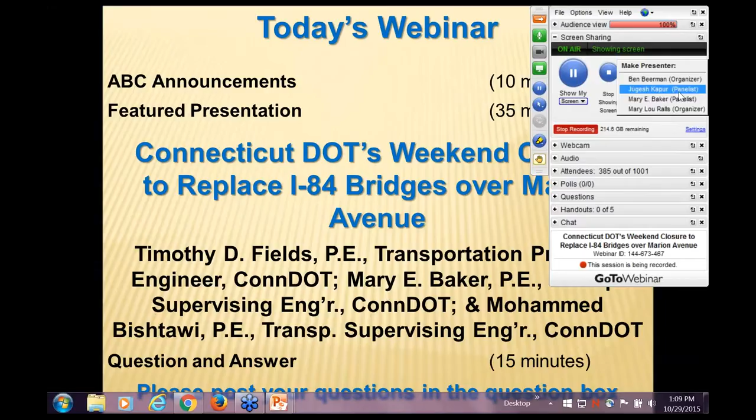Thank you, Mary Lou. I'm Tim Fields, Principal Engineer and Bridge Consultant Design in the Office of Bridges with the Connecticut Department of Transportation. With me is Mary Baker, who will speak about the design phase of this project, and Mohammed Bishtawi, who will speak about the construction phase.

Before we get into that, I want to note that we kicked off our ABC practice in Connecticut in 2011, when we put out a notice to all our designers that we wanted ABC considered in all projects. Prior to that, we actually had several ABC projects before we called it ABC. Back in the 90s, we did two bridge deck replacement projects, significant projects using precast deck panels.

And then in 2004, we did a single pick on a 300-foot truss that was part of our Church Street extension project, which is in the database right now. That was an 800-ton pick that was dropped over about 10 track widths, and these were electrified railroads. So on that particular project, we were driven to ABC by cost.

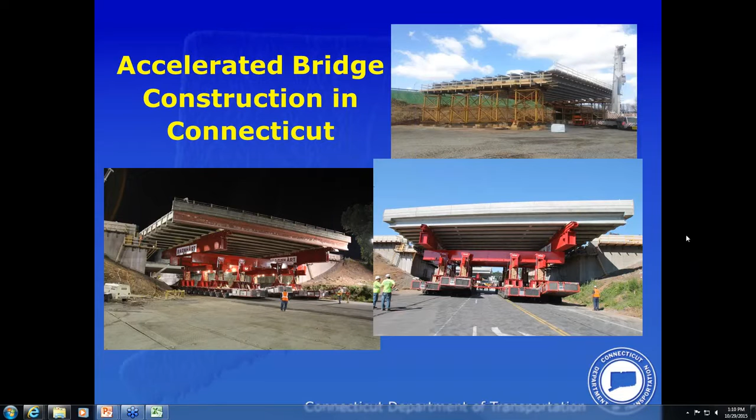But to speak to this project here, given the number of ABC projects we had done, we were keeping our eyes open for a project that would be suitable for SPMT or lateral slide of a superstructure. As we got into this particular project, it became evident during the early design phase that this was a very good candidate for SPMT.

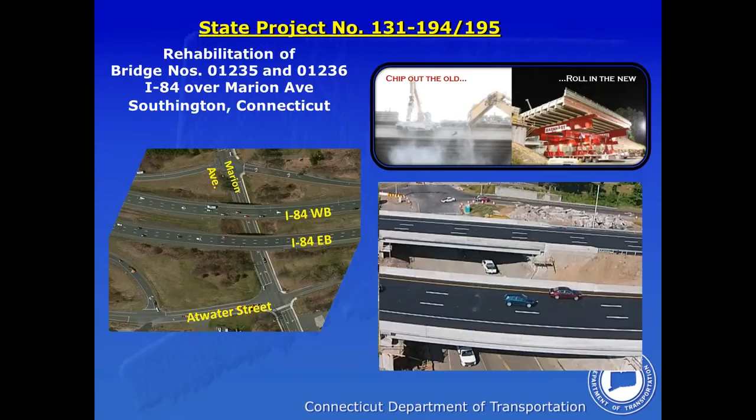The particular span is about a 102-foot span, constructed in 1963, and Mary will speak a bit more to that. But Mary, at this point, I'd like to kick it off to you.

Thank you, Tim. Hello, everyone. Mohammed and I have really enjoyed the success of this ABC project, and we're happy to be here today. We've been able to present this project to several groups. The Southington Superstructure Replacement Project really helped DOT here in Connecticut transform our bridge program and increase the use of ABC.

This slide shows the map of Connecticut. You'll see our major interstate routes and expressways in purple. Southington is located in the center of the state along Interstate 84, just north of the east-west Interstate 691 that connects I-84 to I-91. So we have good interstate and expressway alternate routes here.

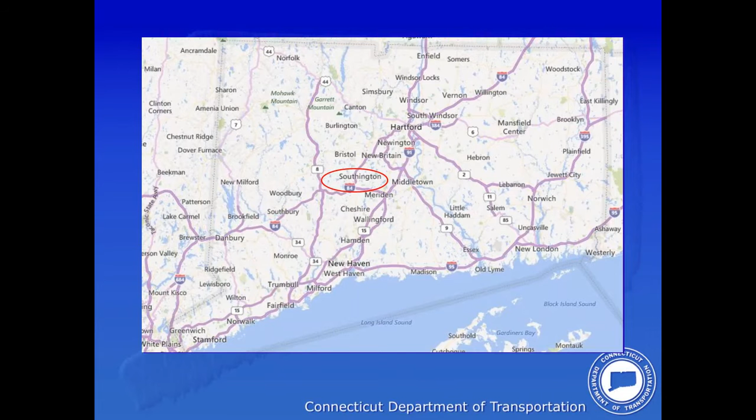This is the aerial view of the site at I-84 Interchange 30 in Southington. The interstate crosses Marion Avenue, a local road. Notice the ample area, all state right-of-way, within this interchange because of how the off-ramp heading eastbound exits onto Atwater Street. The village of Plantsville is just to the east, or right.

Again, the bridges were built in 1963. Both superstructures were in poor condition, and each bridge carries 3 lanes of traffic with an approximate volume of 86,500 vehicles a day. So traveling on 84 eastbound, before you get to this exit, you would see an exit for our truck stop, a very popular venue at exit 28, and also a rest area for travelers between that truck stop and this exit on Marion Avenue.

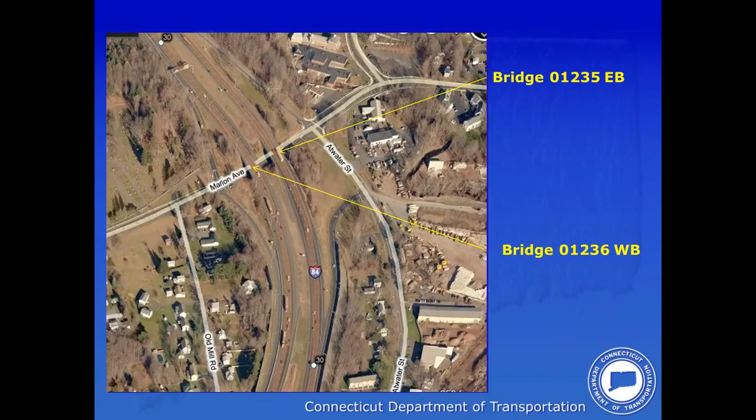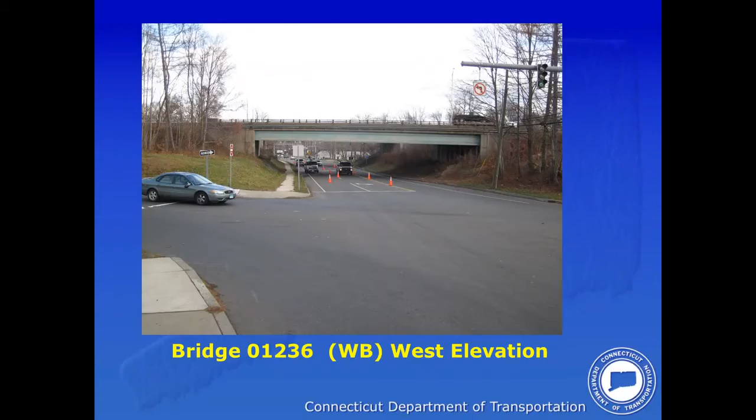Notice the grade of Marion Avenue heading away out of the picture, toward the village of Plantsville. We had a look into that grade.

When we go out to the public, it's difficult for them to understand the need to replace the superstructure. When you're looking at the fascia beams, you don't see as much, but underneath you can see the conditions of the existing beams. There were hollow areas, cracking, exposed reinforcement and tendons. The girders also had longitudinal cracking.

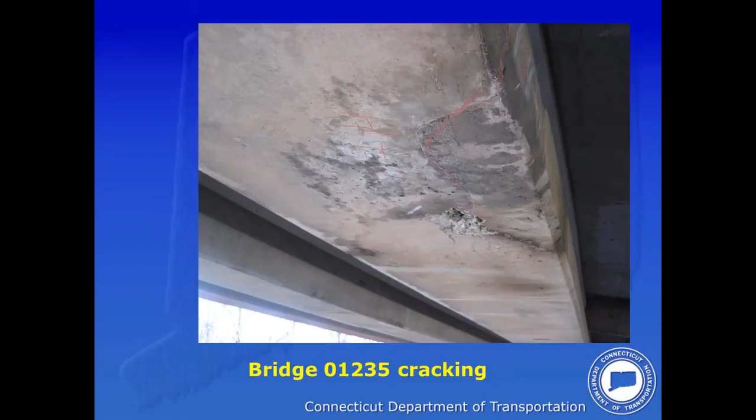Here's an example of the condition of the beam ends. Several beam ends had diagonal cracks with large surface spalls, exposed rebar and tendons. The substructures of these bridges were in good condition, so our project involved replacing the superstructures.

We reviewed different options to maintain traffic. Originally, upon request, our designer presented stage construction plans maintaining 2 lanes. However, our DOT traffic unit expressed concerns about that volume of traffic being able to be effectively carried in 2 lanes. So Stantec, the designer, reviewed the cost of widening the bridges to the interior median side for both barrels of the highway and staging the project using 3 lanes. They also reviewed the ability to have a crossover at this location and utilize a temporary bridge.

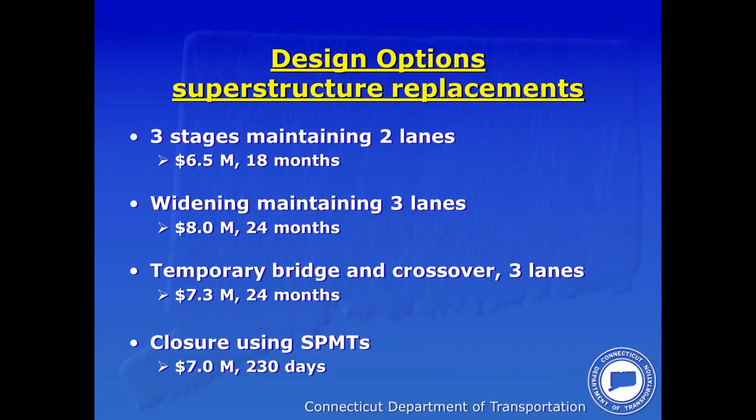Close, Jensen and Miller, our liaison firm, researched the use of SPMTs and estimated costs. Here are the options you see on the screen. Really, they were all fairly competitive from a construction cost standpoint. However, adding in the user costs and inspection oversight, the ABC alternative really was our best choice.

So we selected SPMTs. We're confident that both barrels of 84 could be replaced in 1 weekend. The contract documents provided for a 56-hour maximum closure, and using ABC provided for a safe work zone, allowing us to minimize disturbance to the traveling public and nearby businesses. ConnDOT was interested in joining other states in constructing projects using prefabricated elements or ABC techniques. We all had the same goal: get in, get out, and stay out.

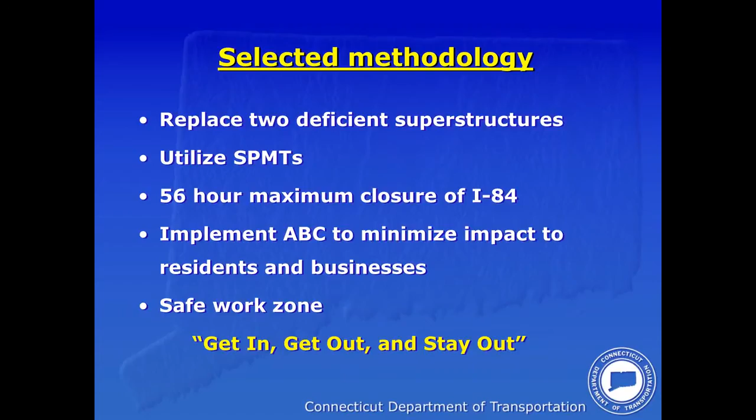The designer detailed these 48-inch New England bulb T-girders for the superstructure replacement. Since the abutments were in good condition, we chose to stay with the pre-stressed girders to minimize substructure work and to stay with the same girder spacing. 10 girder lines per bridge were maintained. The plans call for minor abutment modification and pedestal reconstruction. A steel option was reviewed but found to require more abutment reconstruction and more cost.

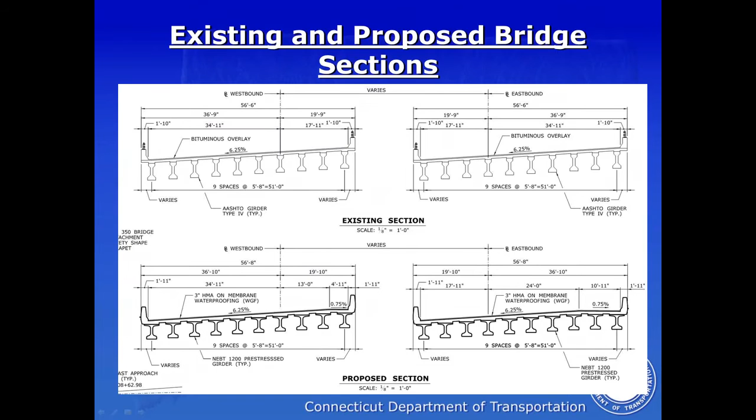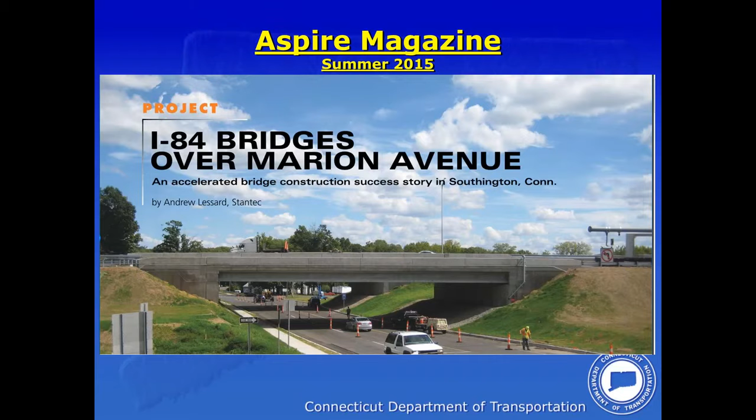Our primary contracting method here in Connecticut is design, bid, build. So we provide the bidders with our plan sets and this potential scheme. To read more about the design and construction of this project, you can review Aspire magazine. The summer 2015 edition included an article by engineer Andy Lessard, who works for Stantec. It's a nice article to review, and you can download it online.

Whoops, I advanced too quick here. Hold on one second.

So we knew in design that we had a difficult road ahead of us regarding public outreach. Department Bridge and Traffic staff held meetings with the Town of Southington manager, engineer, police, and fire chiefs. We gained their approval of the idea for the closure of I-84 and held a public information session in 2011. The design group continued to assist the construction team for all of these listed meetings.

We held a pre-bid conference for contractors to review the many questions we received during the project advertisement regarding timeline, incentives, disincentives, and other items. We met with many local groups, and our construction team offered tours and site visits for our fellow DOT staff, because this was new to us, and even Southington High School engineering students.

But our outreach was more than just the local area. We coordinated with neighboring states and federal agencies. Emergency management coordinators contacted area hospitals. We even notified the FBI in case they were transporting officials or prisoners.

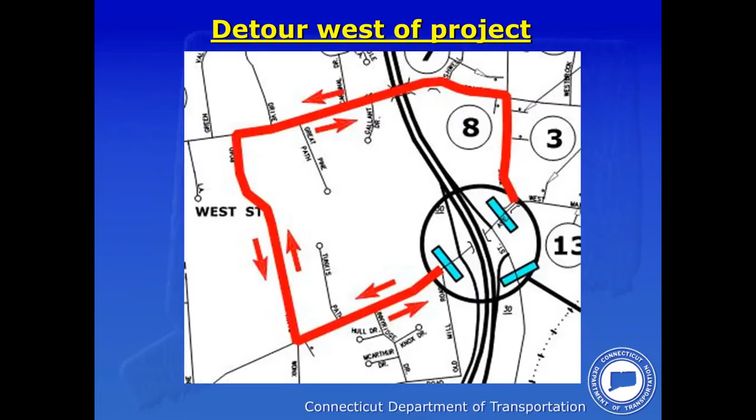At our local meetings, we showed all the detour routes. There was a short local detour around the site, so that was easy for residents in town. Because the bridges were located at the Diamond Interchange, we chose to route one lane of 84 traffic along the on and off ramps, so one lane went down and back up. Doing this, we contained the contractor to the inside of that traffic flow. That was something to consider.

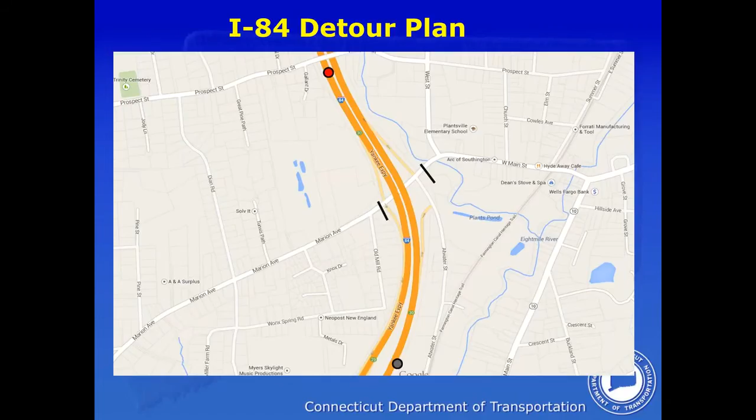The incident management signs were just that—if there was an incident, they had to say something like a missing person or traffic alert for some other route, not our own project, but we kept them live during our project. We used them in advance to display messages about when the project was coming, to give forewarning. There were a lot of conversations with our traffic group about what the signs should say and when to display them.

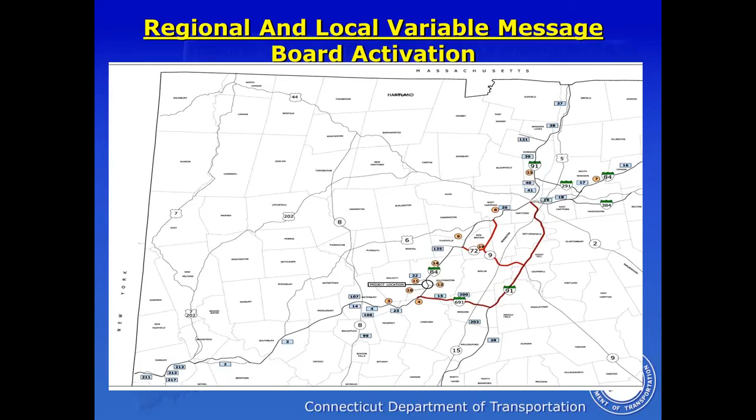Here on this map you can see in red the bypass route. Our bypass for the interstate used other interstates—691 and 91, back to 84.

The press gave good coverage of our activity, both local and state papers. If you still read the paper like I do, they covered the news of the upcoming project.

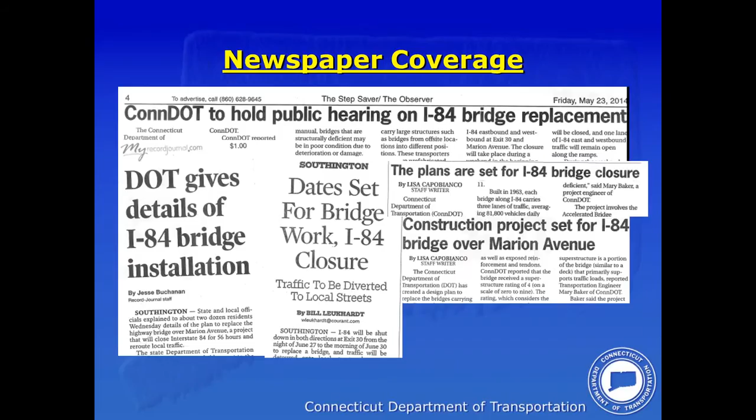We had the state police sergeant film a radio and TV announcement notifying the public about the upcoming work. In the months prior to construction, she organized our team traffic meetings with design, construction, and contractor staff, and we held meetings at the Southington Police Department with local EMS and state police.

I encourage every DOT to assign a point person to manage communication and work zone safety meetings. This was a construction pass we had printed to limit site access during the move, to construction staff and contractor staff.

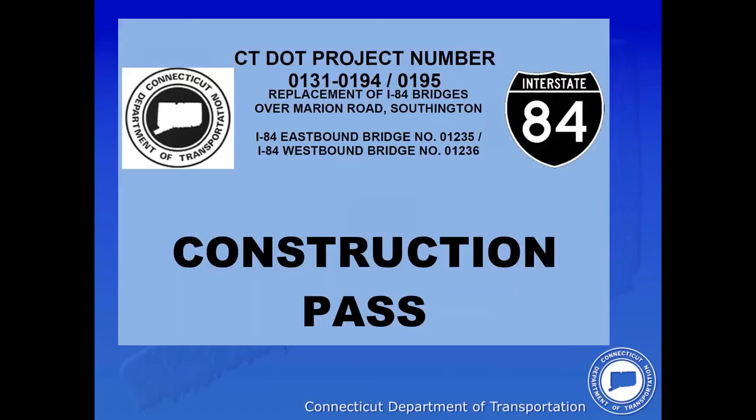Mohammed will speak to the construction activities. Good afternoon, thank you Mary. This is Mohammed Bishtawi, supervising engineer with the Department's District 1 Construction. I've had about 31 years working with the department, mainly in construction.

I want to give you a little idea, before getting into the specifics of construction, of how we do things in the Northeast, since we're a bit different. We have people from all over the country. We have a construction season that starts April 1st and ends November 30th, then from December 1st to March 31st we have what we call winter shutdown. This project was intended to be done in one season, supposed to be completed in 2013.

One approach we took, as Mary mentioned, was holding a pre-bid conference with all the contractors to explain our scope and what we were looking for, so they knew what they were bidding on. After the bids were opened, we met with the low bidder to make sure they had the confidence level that they knew what they were getting into and could do the job, and to answer questions for us.

We were supposed to start around April, but after our meeting with them, we decided to take a full 60 days between bid opening and award, and then a full 45 days after award to notice to proceed, to move things along properly—pushing the job to the following year and using that time to review all the submittals.

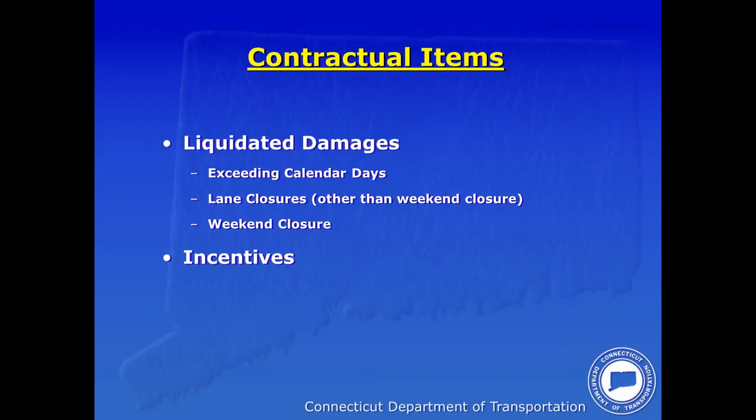Here are some of the contractual items on the job. You can see we have 3 kinds of liquidated damages, and we also had incentives. The calendar days, if you go over 230 days, that was about $2,000 a day. The lane closures for the pre-stage varied depending on the lane, eastbound or westbound, with certain hours. And the weekend closure, which I'll get to in the next slide, also had incentives.

The liquidated damages for a weekend closure were about $100,000 per hour per lane for each direction of I-84 or any portion thereof. However, this added up a lot. If somebody was going to be late for a day or two or a few hours, there were a lot of questions during the bid phase, and the department decided to limit the ceiling for the liquidated damages to $1 million.

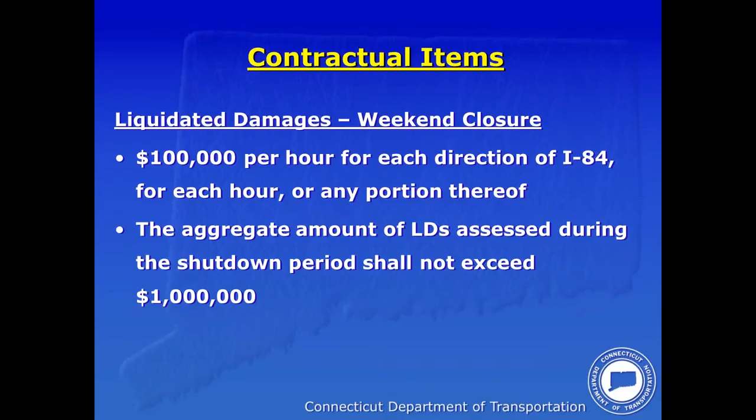These were the incentives also given to the contractor. It was kind of a late decision to add them. We added an addendum giving the contractor $250,000 if they finish by Sunday 10 AM, $200,000 if they finish by noon, and only $150,000 if they finish by 5 o'clock Sunday. I'm happy to let you know they did make the $200,000 incentive, having the highway ready to open by noon, even though we opened it later for final paving and markings, but the intent was met for him to open the highway by noon Sunday.

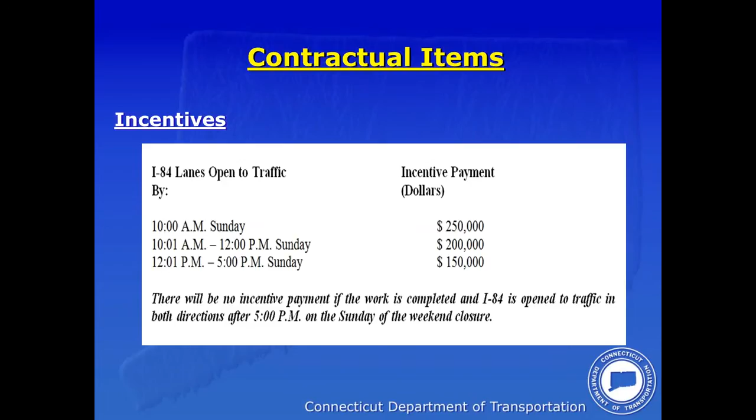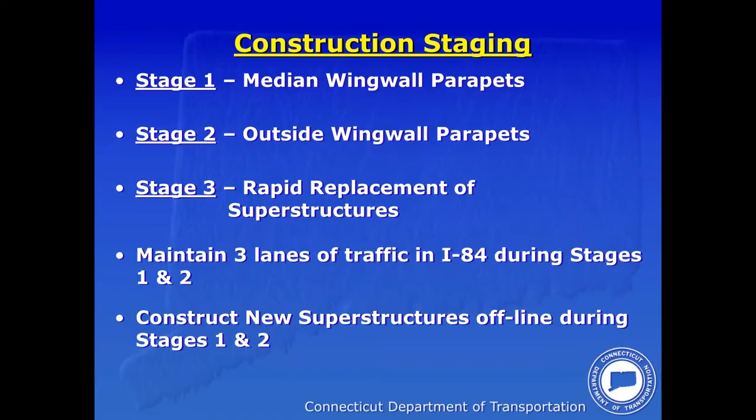There are 3 stages the contract was made into. Stage 1 was the median wing wall parapets modification. Stage 2 was the outside wing wall parapets, and Stage 3 was the weekend replacement. We were supposed to maintain 3 lanes of traffic on I-84 during stages 1 and 2, and for the weekend closure we shut off the highway but kept the ramps open.

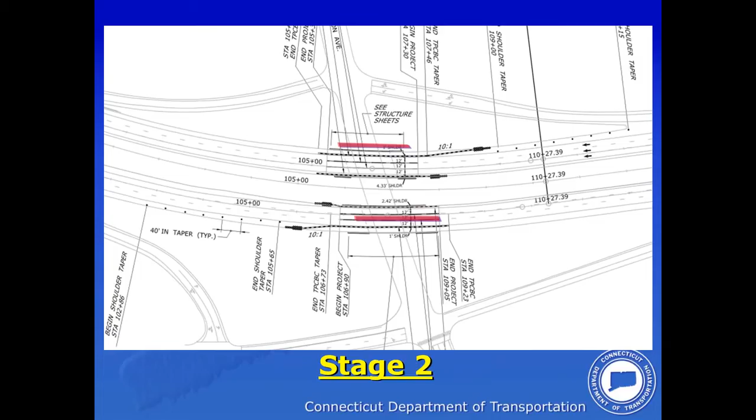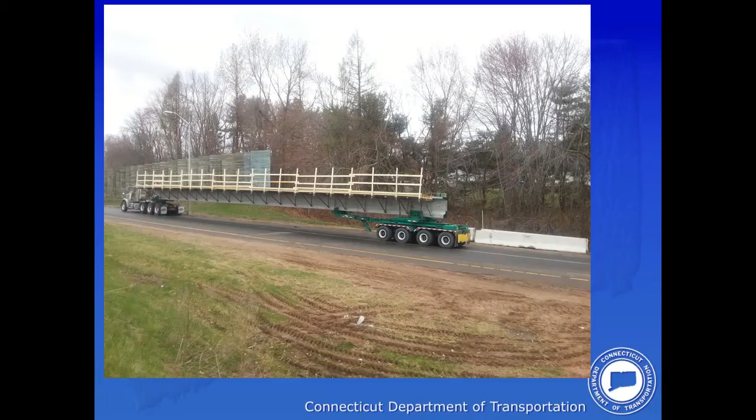This is another shot of the westbound staging area where we built one of the bridges, using a 600-ton crane to set the beams for the area. Point worth mentioning, at the westbound area we could only put the beams under the bridge and eventually pick them up with the transporter when we were ready to make the move, due to the geometry and the ramp configuration, and since the ramp was going to stay open during that weekend. So this was a special arrangement we had to do for the westbound side.

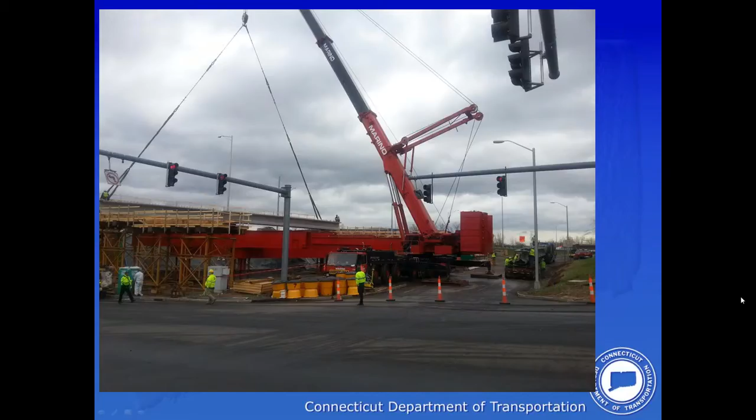This shot shows the eastbound staging area with the eastbound bridge. The beams were already put together. We poured the concrete diaphragms onsite, as you can see. We also had to build the stairs and everything, and this was about 22 feet high. It was built to resemble the final position the bridge was going to go on once we actually moved it. So this was about 22 feet 6 inches high and was built right there.

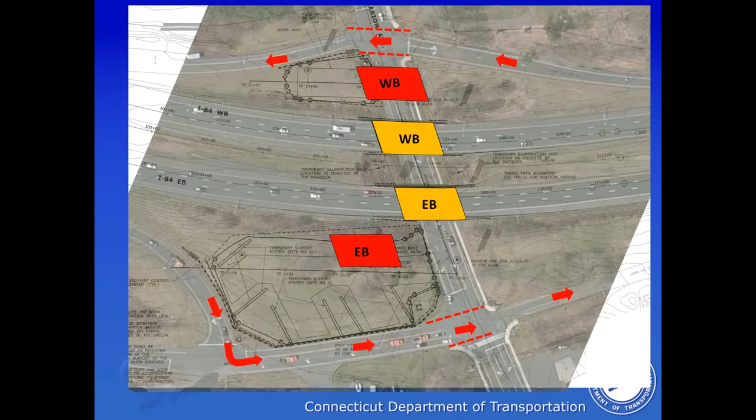Now, here is what the rest of the animation shows: removing eastbound, demolishing westbound, which fades away as it's being demolished, and moving eastbound into place. Then once westbound was totally demolished, they moved westbound into place.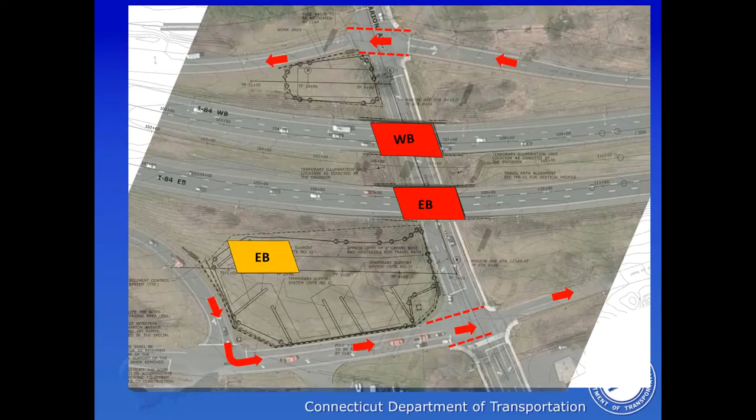One of the requirements we had for the contractor was that we made it part of the spec to provide an hour-by-hour schedule for the whole weekend operation. He did show, like I said, he was shooting for 10 o'clock Sunday morning, and his schedule showed enough float for that to happen. Unfortunately, other things happened, and some unforeseen issues took place, and it took us a little while, but he still met the incentive and got the $200,000.

This is the closure schedule, showing how it was supposed to happen. I just want to point out that the first point, where it says 9 a.m. Southington rest area, wasn't part of the original scope or plan.

However, during our meetings that Mary alluded to, we had about two months of meetings almost every week or every two weeks with the police department and everybody. We had state police and city police involved, and they suggested using a nearby rest area as a unified command center, where we could put computers, watch the cameras, and communicate with the troopers on the side about any issues that arise. It was manned by maintenance, construction, city police, state police, fire department, and ambulance department, all available at the command center 24 hours.

At 5 o'clock, we were supposed to close Marion Avenue, as I showed, to box in the work area. We decided to also close the ramps at that time, since nobody could turn left or right at the same time, so the contractor was getting ready.

The original plan called for closing the highway totally by 9 p.m. You can see the sequence where we take one lane, two lanes, and eventually the full three lanes. We did the move on June 27th, Friday night, and were supposed to finish Monday by 5 a.m. We were lucky to finish a little earlier.

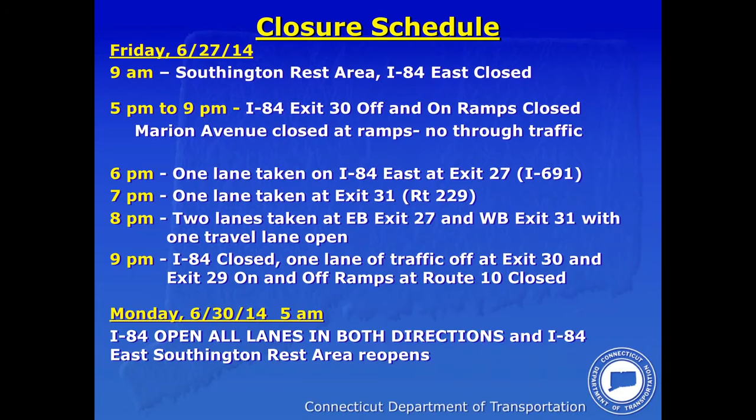This is a shot showing the eastbound bridge being removed, and you can see the SPMT carrying it and moving it.

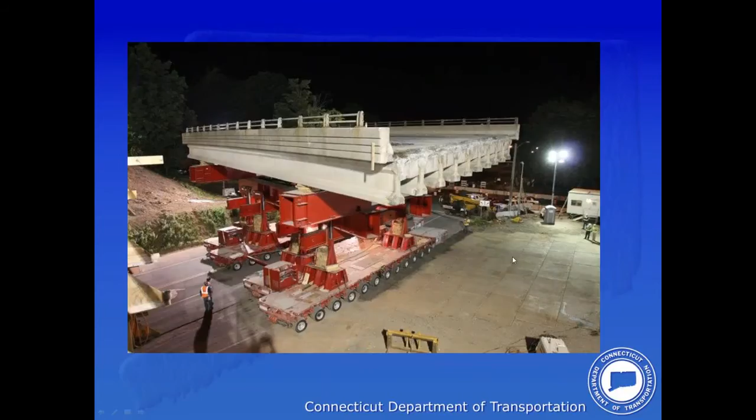This also shows the same bridge moving into the staging area. I want to point out these HDPE mats here. One issue we had was a tree in the back—as we were trying to make that turn, the tree was in the way, so we had to do some tree trimming that wasn't planned during the move.

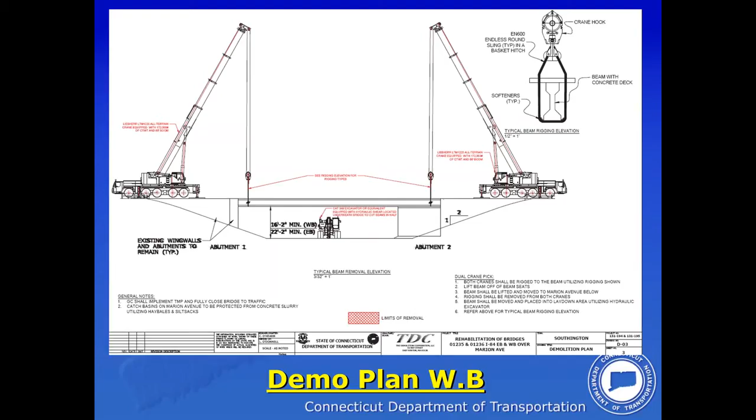This shows the demolition plan or schematic that the contractor submitted for the westbound bridge. Basically, it was going to be a double pick with two cranes, one on each side, picking up the beams, saw cutting longitudinally along the beams, and picking them up to drop them on the ground.

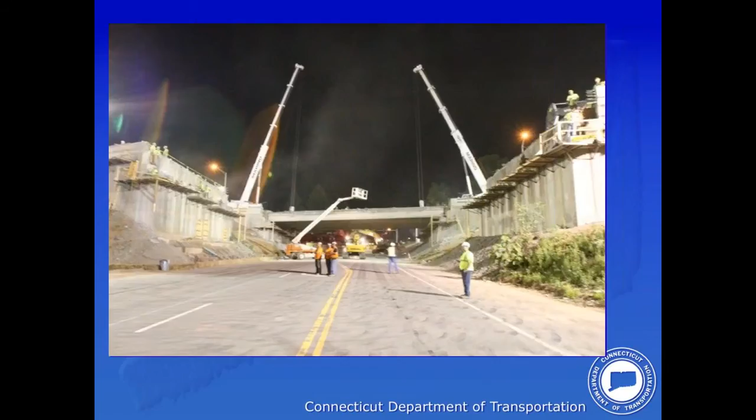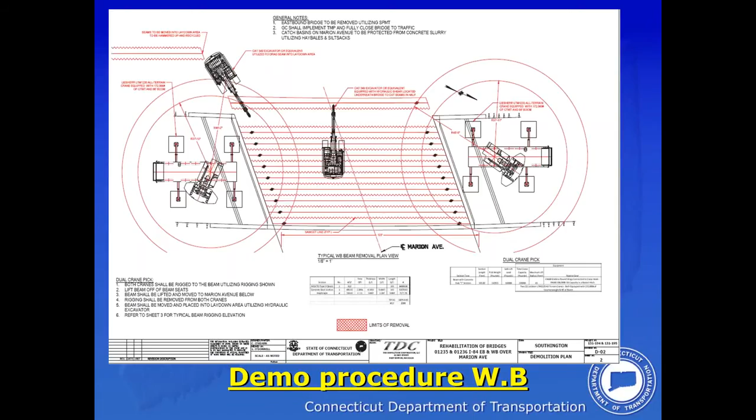This is an actual picture showing the two cranes in place. The east span was already moved, as you can see. Once we dropped the beam on the ground, it was supposed to land on steel plates, and we were supposed to use a Cat excavator equipped with a hydraulic shear to cut it into pieces and move it to the laydown area. This slide shows the actual beams being picked up, with the Cat excavator on the side trying to do it.

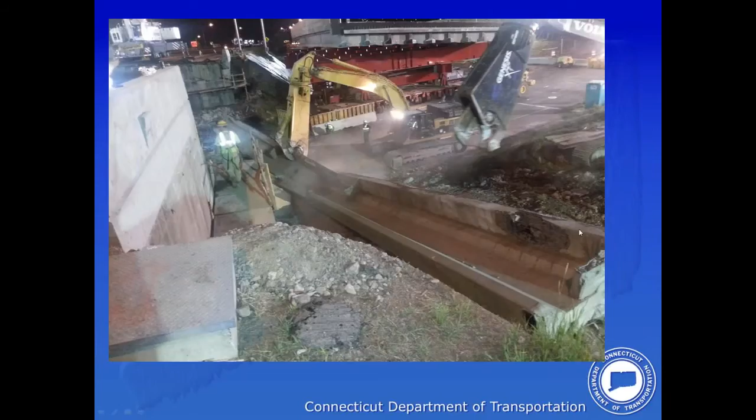What they actually did was something different—these guys were experts at demolition. They placed the beam on a few crane mats on each side, then rolled the beam so it would break in half, and then used the shear, which you can see there, to break it at the side and move it to the laydown area.

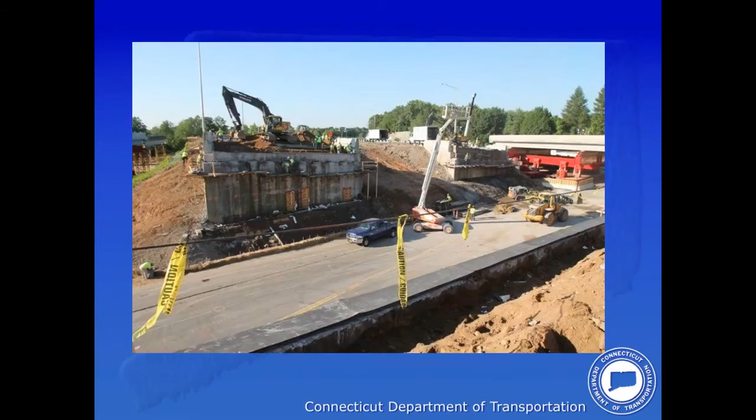This is a shot showing the new bridge going into place for the east span. I want to point out these things - this is the SPMT, basically made of 8 trailers per bridge, 2 in tandem and side by side. Part of the contingency plan was to have these power packs, which weren't needed but were there in case one broke down. This whole thing was operated by a guy with a joystick. A lot of people were interested in how much he was getting paid - I had no idea, but he had the cool job.

I want to show you in this picture, you can see the block here. We have what we call the gantry system - there's a pull-up gantry that can go about 60 inches up and down to move the bridge. We also had for the transporter deck, the 12 axles, 6 per trailer, which can go 3.5 feet up and down while the deck is maintained level. That was a very important thing.

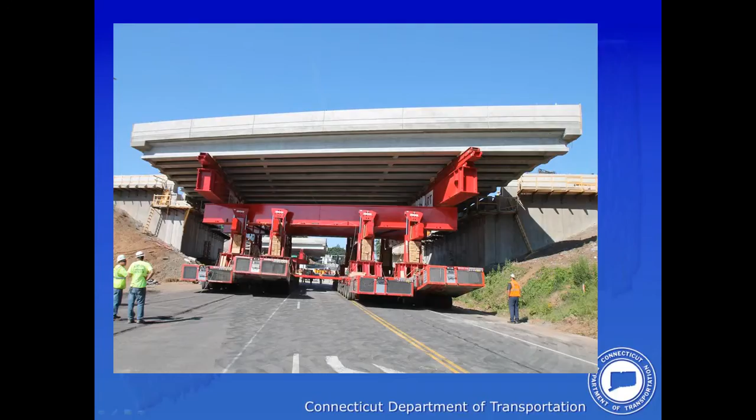As we started doing the work, I want to point out the blocking we used - even though it's hydraulic force, we made sure nothing fails so it doesn't drop. They would raise it a few inches, put the blocks in on all sides, then raise again and put more blocks. They kept doing that, so that process took about 3 hours just to raise the bridge to remove the old one, and the same for the new bridge.

This is showing the westbound bridge also being ready to move into place. There was a question about monitoring during the move. The fascia beams had wires inserted for monitoring, and during pouring of the deck we installed some wires for monitoring. A consultant was hired by the contractor. Right on top of the bridge there were some prisms and strings to watch for any movement, twisting, or change in the operation. It was being monitored throughout the move.

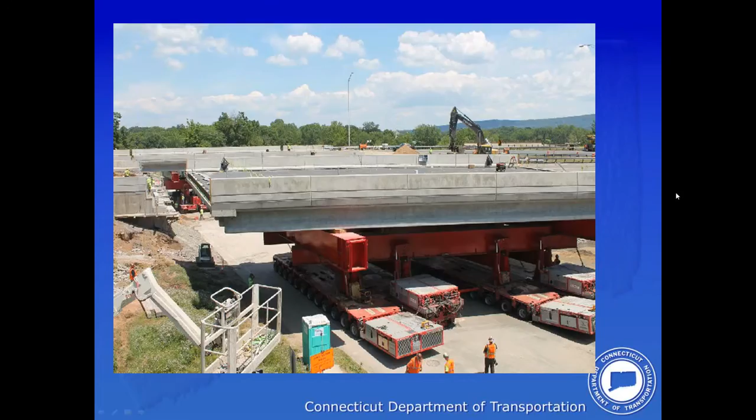This is a schematic the contractor submitted during the analysis of the move, showing exactly the weight calculations, how many trailers we needed, and how the trailers had to be in a skew and staggered, plus how to build up the trailers with the gantries. We had 2 different bridges, so 2 different SPMTs of 8 trailers each. Those trailers came from all over the country - Tennessee, Arizona, California - and the whole team, including Barnhart, also came from all over the country. That team had collectively done 9 moves before this one, so we had good assurance this would go well, though you always have that 1% doubt in your mind. It still was able to be done. The speed of the SPMT was 0.3 miles per hour.

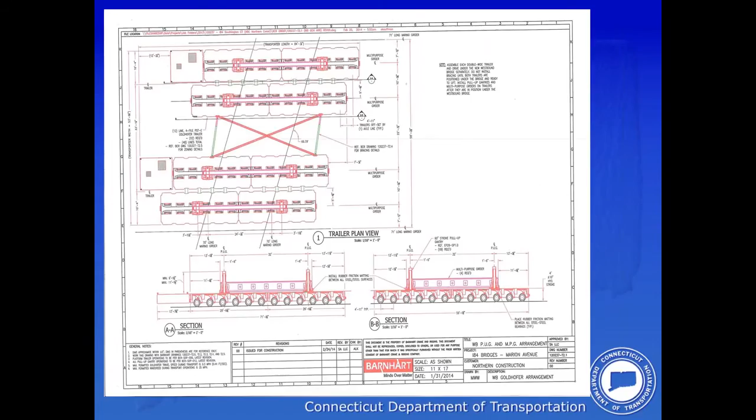This is a 3D scheme of the beams being carried, the bracing we had, and the heights. One of the few things I need to mention is the constraints - if we had winds over 25 miles per hour, we weren't going to go, and if we had more than 1 inch of rain per hour, we weren't going to go. But everything else seemed to work. It was a good summer day in June, and everything went well.

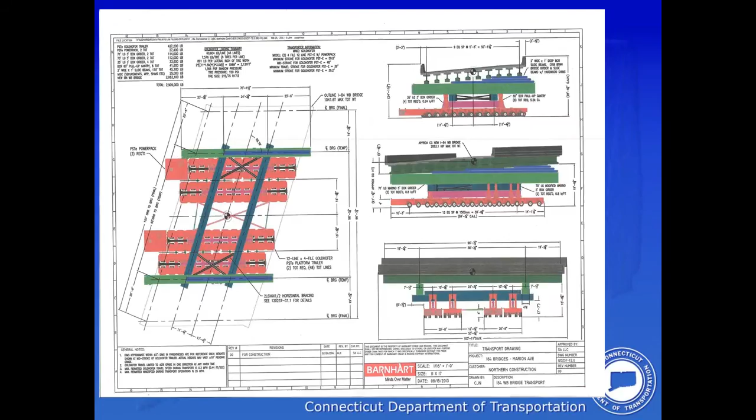One of the things we added to the project was EarthCam, which had streaming video for us and did a time lapse. It was a great tool for us, a great tool for everybody. It kept a lot of people away while they sat at home and were able to watch the whole move, and the managers were able to keep up with that. It really helped us a lot, and we definitely recommend having a time lapse for any future project.

Now I'm going to discuss what we had to do to make it on time, to finish the job on time. One of the things added to the job was having a traffic management command center.

We set it up in the rest area. The DOT CHAMP, our own maintenance and vehicles, patrol the highways to help broken down cars or motorists, because we couldn't afford any vehicles to be disabled along the routes. Our highway operations and the command center were monitoring that, and these vehicles were on all our routes during construction so there wasn't an issue.

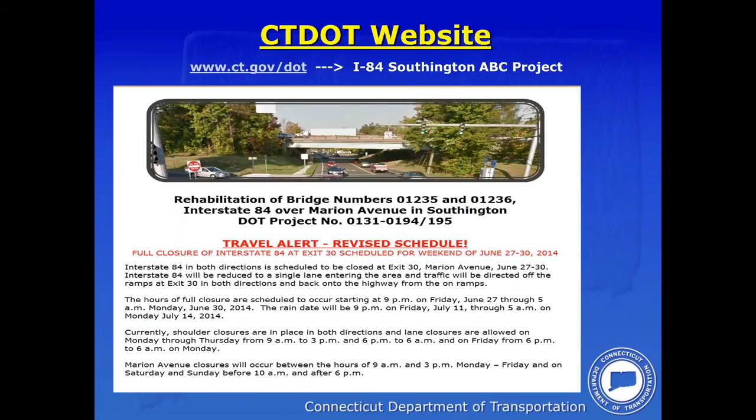We established a project website for the department that everybody could visit, and from there they could also link into the cameras we had.

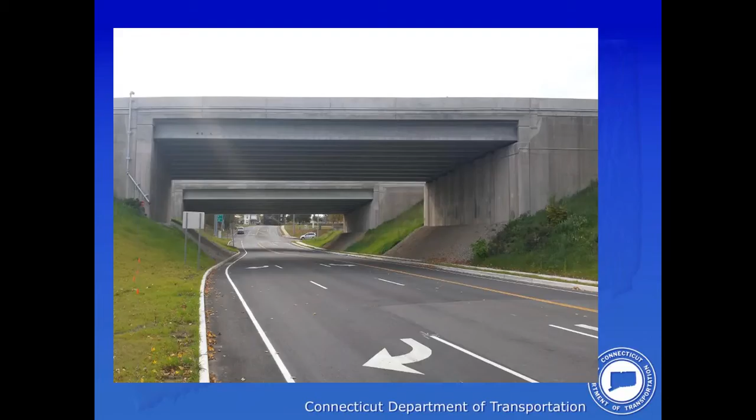This is the last slide showing the final product. We ended up rebuilding the road as a nice gesture to the town - we didn't want to leave it in a bad situation, and that was very successful. Everybody liked that.

Now for lessons learned, I'll go quickly over that. Lighter - we used precast concrete because of the situation; we didn't want to change a lot at that time. The maximum grade for the SPMTs was very important - we thought we'd need 3.5%, but 2% based on the load analysis was adequate.

Travel path - we didn't realize that. We thought we had 40 feet based on our concept, but once we got into it, we needed about 58 feet on Marion Avenue, so we ended up doing some widening.

Incentives and disincentives - we believe more thought needs to go into that ahead of time; for us it was last minute. Advanced utility work - we need to do what we call utility breakout projects to start that, and for the intelligent monitoring/management system, there were a few things we needed to locate ahead of time.

Local review of traffic plans - we should get the towns, police, fire department, and anyone affecting the major route involved early on. That was very important.

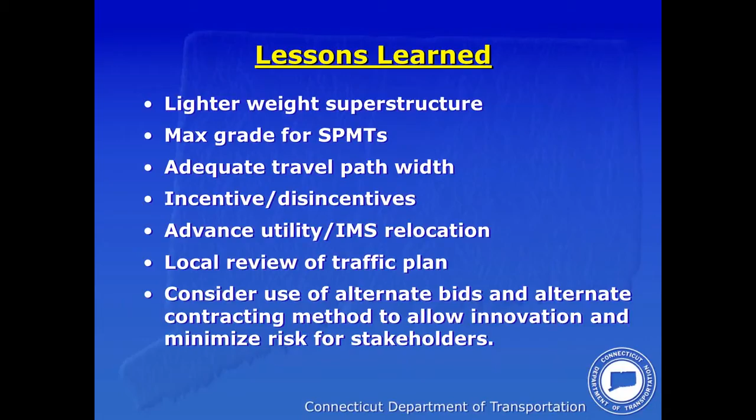The use of alternate methods - we're talking about hopefully design-build or construction manager at risk contracts. We're looking at those for the future.

Time for working drawings worked out good for us, but there was so much to review that delaying the notice to proceed and award date helped us a lot, since we used the winter time to review the plans. There was so much.

Staging areas and contract items we could include more on the contract or make it part of the things. For the bearing plate shims, we only showed one size, but we needed a lot of variation for one bearing to move up, so we suggest using different sizes and just mentioning them in the detail.

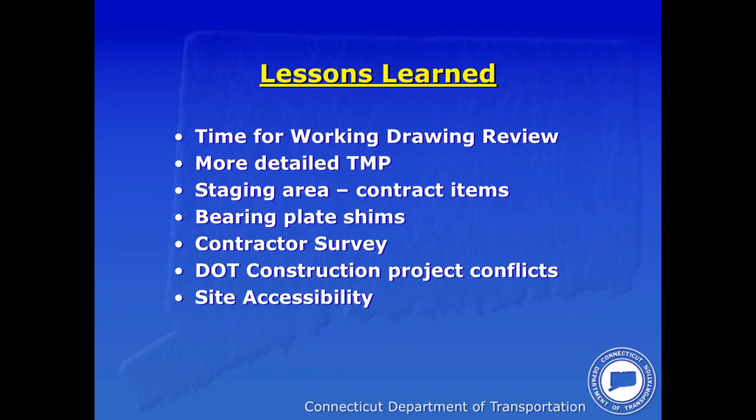Contractor survey, we need to make sure we go through that and confirm the survey is done correctly. We also restricted all projects from working that weekend, since we don't want anything to affect detour routes in the state. Site accessibility is very important, and we were lucky with this particular site. We opened for final paving, marking, and everything at 4:40 eastbound and 8:15 westbound.

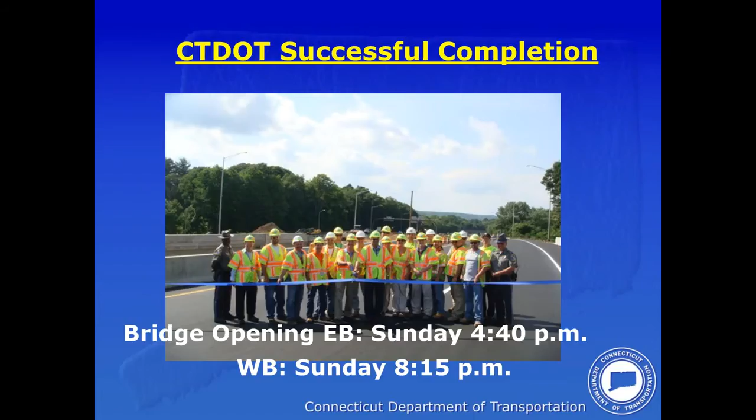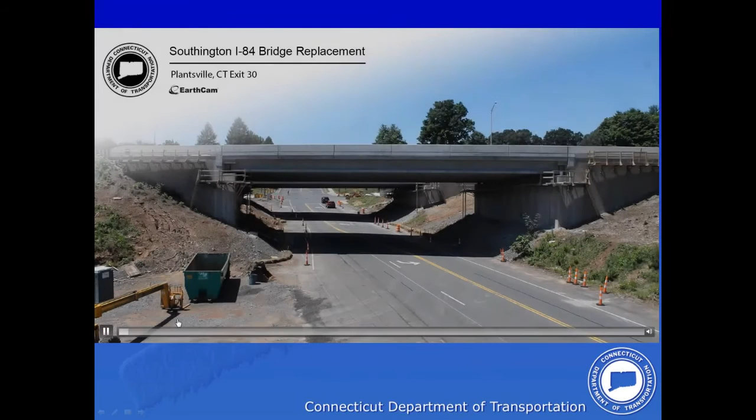We'll play a video. You may not hear the sound, but this was a time-lapse video done for EarthCam that we added to the project, so please enjoy watching.

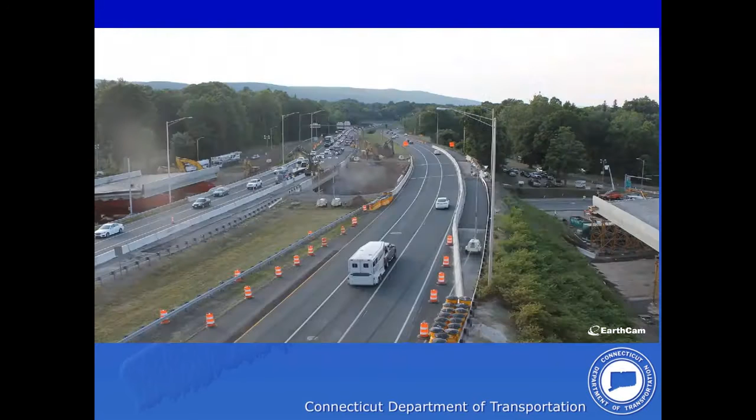We made out pretty well with the closure on 84. Friday night we didn't get the backup we expected. Terry had an estimate of how many miles, and it wasn't even 2 miles, I don't think, at the start. People were able to flow through that site with the one lane.

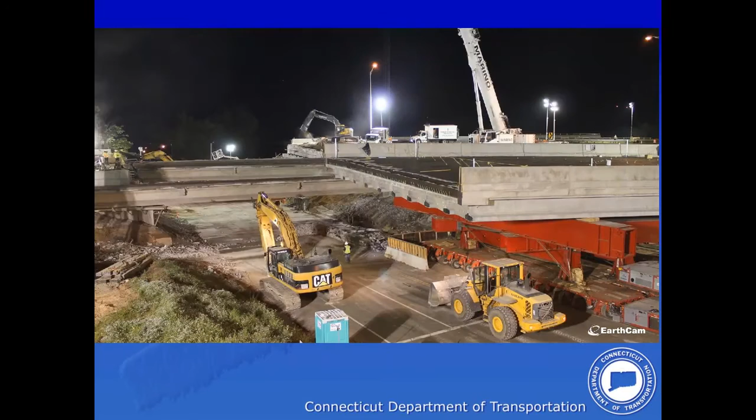One thing I'd advise is, we just had the barrier, but it might be nice to have some screening, because traffic actually slowed down to see what was happening at our work site since it was so interesting.

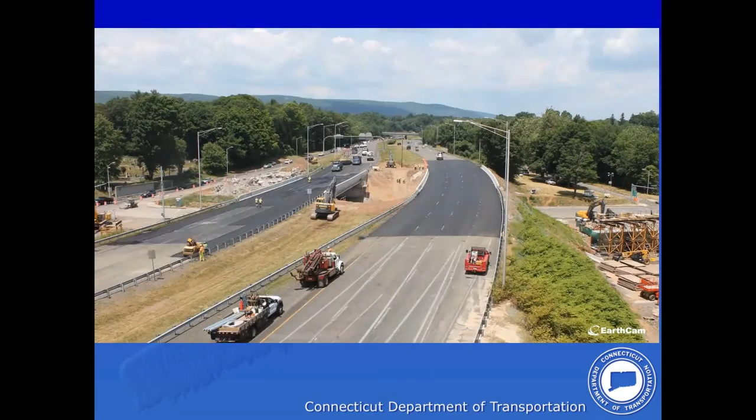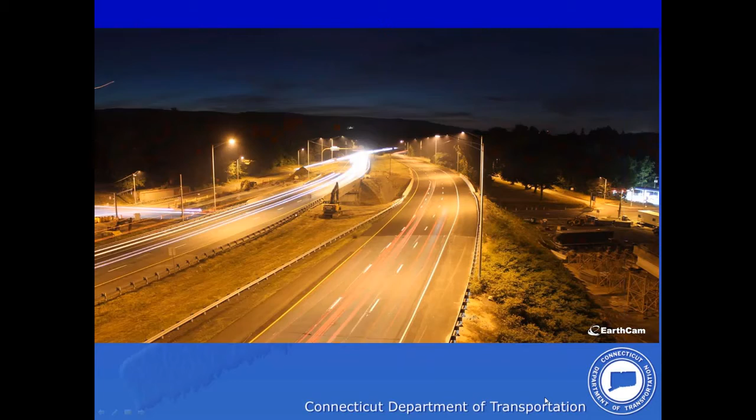Thank you, Marion. Mohammed, I just wanted to, Tim Fields again here, say a few words about ABC looking ahead for Connecticut DOT.

Right now we have 2 lateral slides in the works. These 2 projects, one in Waterford, I-95 over Oil Mill Road, is anticipated to be in construction in 2016. Another project in Norwalk, 102-295, I-95 over Connecticut Avenue, also has 2 lateral slides, expected in 2017.

We also have 2 projects in the works involving SPMT superstructure moves. One in Stamford over I-95 is scheduled for 2017 construction. Another unusual project in Stamford, 135-301, is a replacement of a Metro North railroad bridge, a 5-track railroad bridge, where the span is going from a single span to a 2-span, with under-clearance improved from 2 lanes to 6 lanes. We'll be using SPMTs as part of that, probably one of the most challenging projects we have in the works right now.

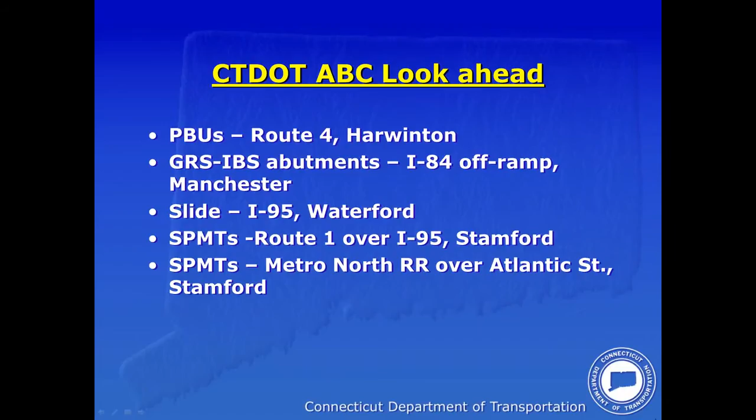We also have about 15 other projects of much smaller scale, some GRS-IBS, some culvert replacement, and some rigid frames using precast elements, including all substructure units.

I feel we're moving ahead soundly into ABC, and to help with our decision making, we've developed this ABC decision matrix. This is similar to Utah DOT's, with some variations we put in to fit better for Connecticut. This decision matrix would be used on projects involving deck replacement, superstructure replacement, and entire bridge replacement, during the preliminary design phase before we get to design approval and final design determinations.

There's a weighted table, Mary, if you want to bounce back to it. In the lower right-hand corner, the matrix uses 10 measures, and those measures get drawn into an ABC rating table with weighted factors. You can't really see this easily, viewers, but we have 3 rating categories: favorable for ABC, marginal for ABC, and ABC not recommended.

So that's where we are today. We've used this matrix on a pilot basis on probably about 6 different projects right now, and it's going to be issued very shortly for general practice across the board here at DOT.

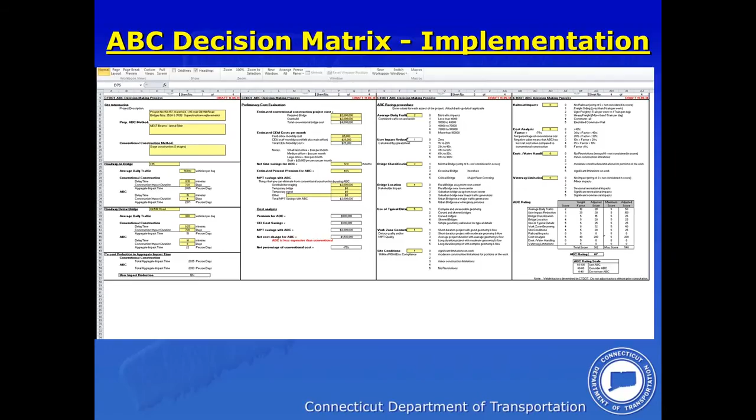With that, I think we're concluding our presentation today on our Southington project. All right, thank you, and thank you all for a great presentation.